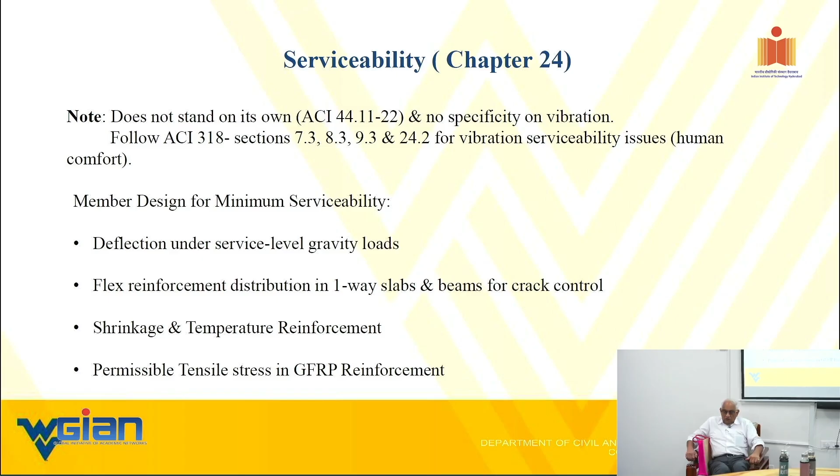If you remember, I said I'd get back to the theoretical part of certain aspects I did not cover, and then I talked about the design example. Yesterday I felt bad because I covered the column design without talking about the theoretical part. So I will wrap up slides 149 to 199, the theoretical part, and then go back to the design examples. All right, let's start.

The theoretical part. I told you many times, this is a course, not an R&D presentation, so pardon me for repeating some things. The idea is to make sure key salient points are retained by you all. You may not remember the details as well as I do, simply because I've been with it for many years. Not that I'm any better, but it's a matter of how you acclimatize yourself to it.

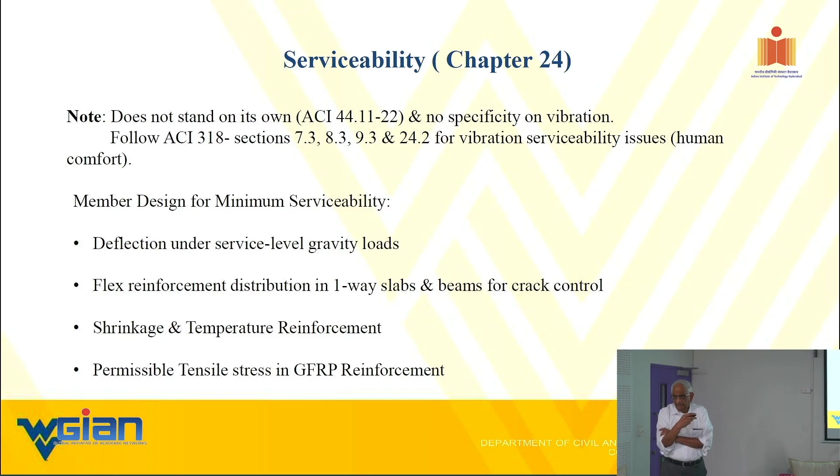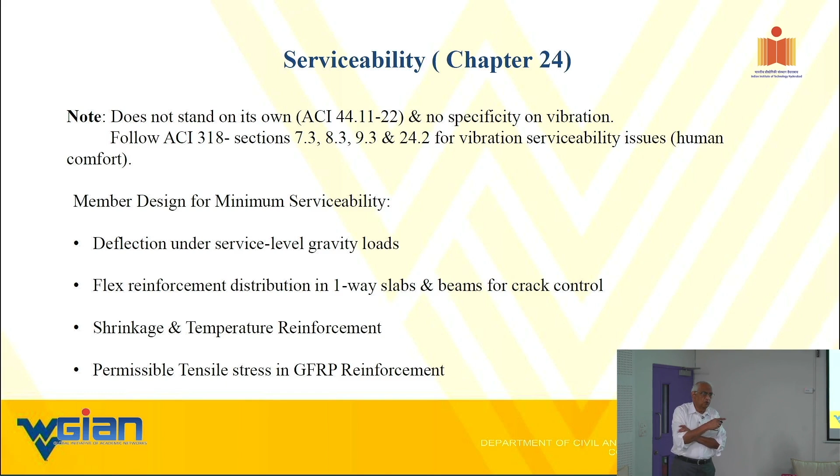Therefore, that's one. So it is even more important that people, there may be walkways on the bridges, people may be walking, pedestrians I mean, while the vehicles are moving. So you see, functionality is, the serviceability limit state varies from one structure to other structure. It also varies within a structure depending upon the functionality of it.

So deflection is one, but it has a lot of other sub parameters associated with it. I just described a couple of them. We can talk on and on about that. That's one. Okay. So the bridges, you're saying that they have more stringent deflection limits, L/800. We also have the same. Probably is it because of the traffic volume that if you allow higher deflections, your fatigue limits will be reached quickly?

Well, that is only one aspect of it. The other very important aspect that we focus upon is the human response aspect. Yeah, I was involved in a bridge, no exaggeration. This bridge, old bridge, 1890s, this is in my town, and nothing wrong with the bridge. There was a light at the end of the bridge, and so people coming from north to south have to stop, whereas there is no light going from south to north.

So what's happening is when the trucks are going from south to north, the people standing with the cars are vibrating too much. So they got scared, so they had to remove the bridge. It's an old-fashioned bridge, in the 1890s. So they put a new bridge to make sure that they satisfied these limits, deflection limit states. That's just one of the several cases.

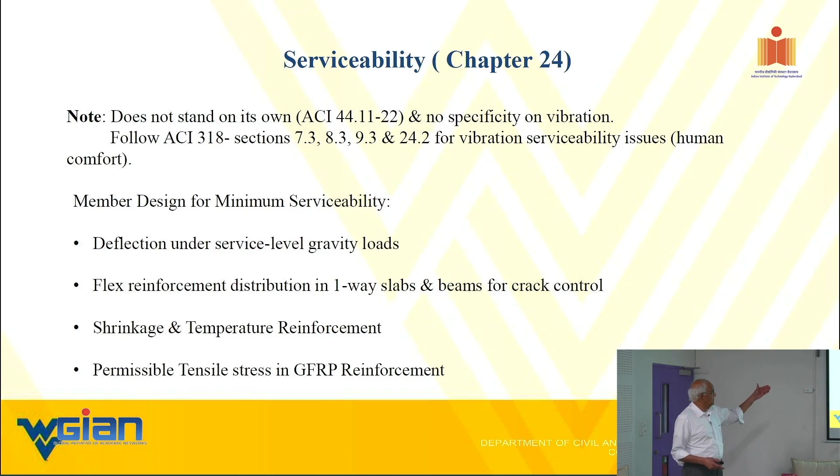I already mentioned deflection. I already gave you a number, L over 360 or 240. Again, it depends on the function of it, and the flexural reinforcement distribution in one-way slabs and beams. For crack control, I briefly talked about it yesterday, and I would like to delve into that a little bit more today, but the message is you need to distribute the reinforcement to minimize any kind of crack.

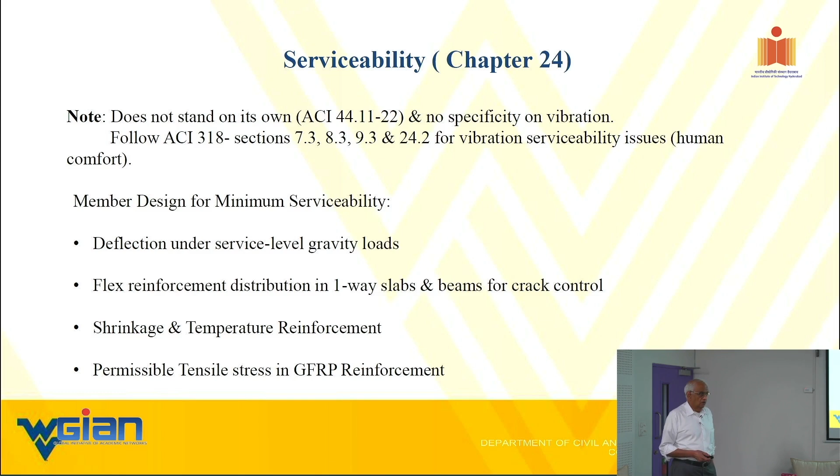And the third is, again, a serviceability issue. The concrete guys are extremely stringent on shrinkage and temperature reinforcement. I don't know how much you use. We use 0.0018 times the bd value per foot. Steel we do 0.0012. 1.2, yeah. We do 180. We are a little bit less.

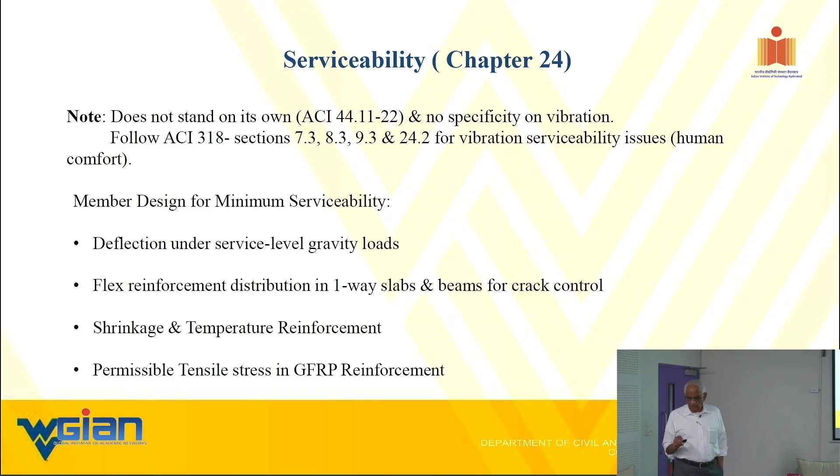Permissible tensile stress in GFRP reinforcement. Like I said, you have seen that 0.01 is the quote-unquote yield value, and that is what we mean by permissible value. That's a fictitious, artificial number, but again, they tied it to the steel yield, and that works. It may be a little bit more conservative, but it works. There we go. And I'm going to show you in a design example what comes straight out.

Flat roof and floor not supporting non-structural members, and deflection for service roof loads, rain load, all those kinds of things where you do not have a structural element. Why they say non-structural elements is minimizing the creep related issues. For that, you see how liberal that is, L over 180. Very, very liberal. Our general line of thinking is mostly in terms of L over 360. See what I mean?

Now, I want to make one thing extremely clear. When we talk about deflection limit states, we are only talking about deflection limit states corresponding to the dead loads. We don't talk about those with reference to live loads. Keep that in mind, because the live load comes and goes, whereas the dead load not only stays there, but also could potentially increase the deflection due to creep.

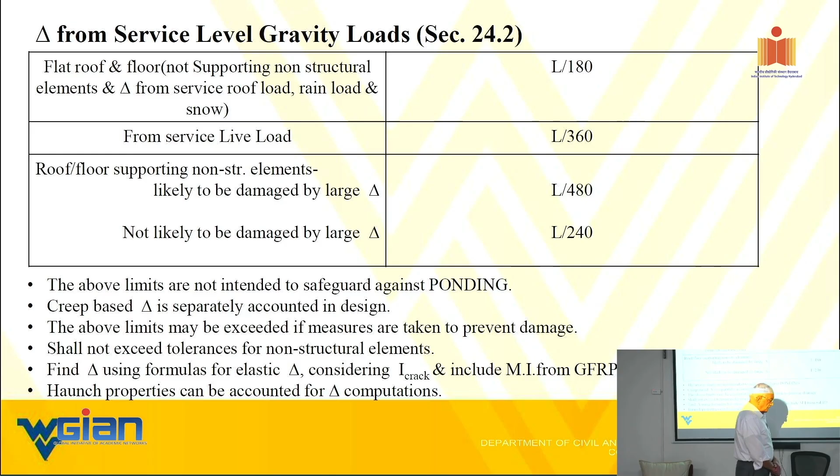If such a scenario exists, L over 480 is what we use. Quick question - do these include long-term deflections, like say 10 years from now? Basically including the effects of shrinkage? We do not compute deflections for shrinkage, but we do compute deflections for creep. Yes, it includes that, but not the shrinkage part of it.

So this is again from the code, section 24.2. The whole chapter 24 deals with serviceability. The above limits are not intended to safeguard ponding - I'm sure you all know what that is. Creep-based delta is separately accounted for in the design. The above limit states may be exceeded if measures are taken to prevent damage, so that is up to you as a designer. It shall not exceed tolerances for non-structural elements.

Finding deflection using the elastic formula, considering the Ie cracked moment of inertia is highly permitted. Haunch properties can be accounted for - that type of thing.

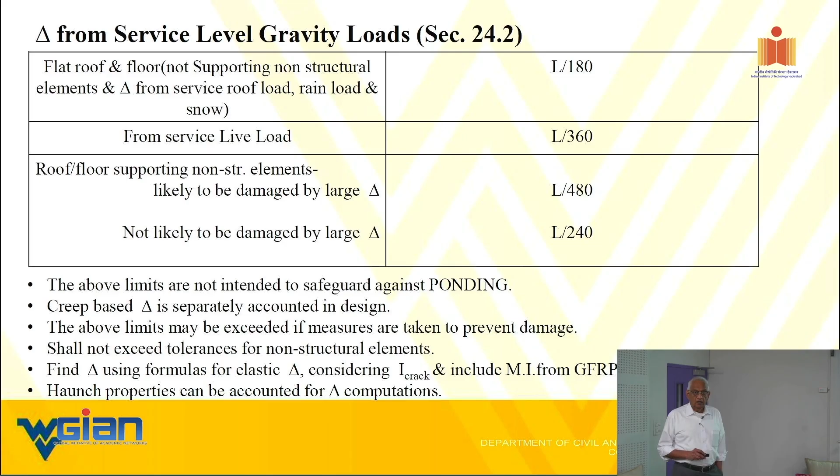So I just read out that, using the elastic formula considering Ie cracked moment of inertia - what does that mean? This is what it means. So what we are saying is, here is an equation that accounts for the cracking of concrete elements that are either reinforced with steel or with FRP. And obviously, elements reinforced with steel are a little bit less stringent than those reinforced with FRP due to the lower E value.

So this is the equation, this is an empirical equation. Branson and Lutz - I don't know how many of you know - it was the original Bible for crack control. It comes from there. For slabs, again, there's a more accurate value, but you can downgrade it by having a more approximate value. I'll show you the more approximate one, but I also gave you those equations, those approximate ones, yesterday.

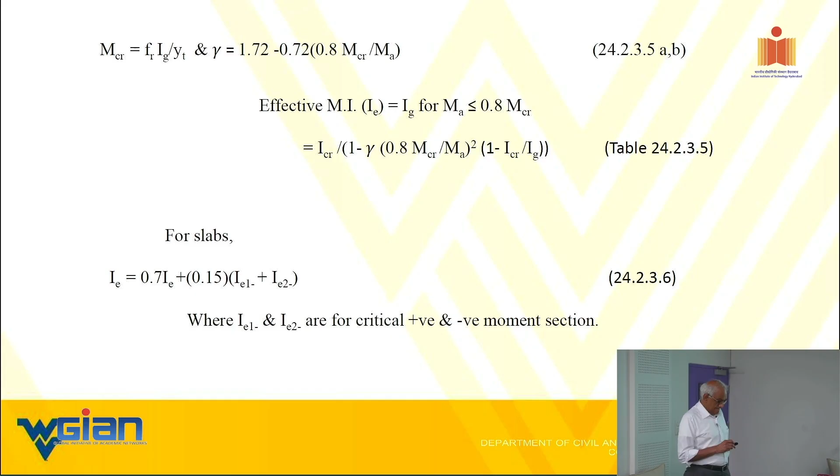So these are coming out of these tables from chapter 24. I showed you this yesterday.

So for composite concrete construction with FRP, if flexural members are shored, treat them as monolithically cast members. If they are not shored, what happens then? A part of it is monolithic for live load, but part of it is not for dead loads. So if flexural members are not shored, load paths before and after composite action need to be sorted out.

Again and again, to make sure you control the crack width, here are the equations given. Distribute reinforcement to control cracking in tension - reinforcement spacing closest to the tension face. These are empirical rules. Again, there is some science behind it, common sense behind it, but ultimately there is no formal derivation behind it.

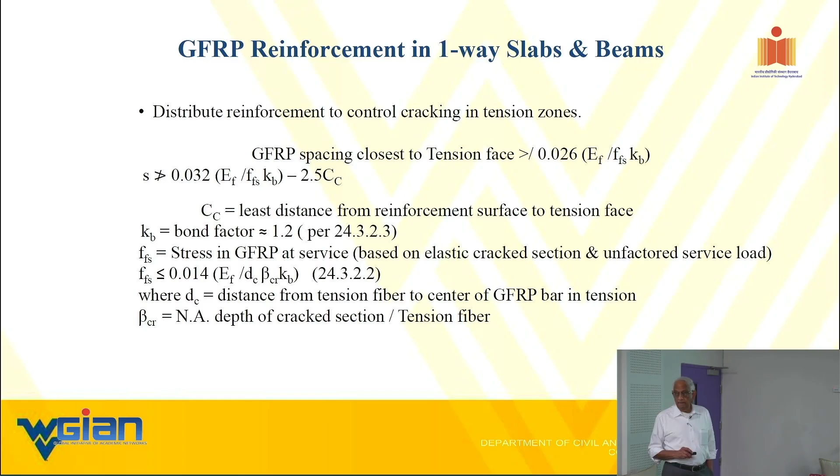If flexural members are shored, treat them as monolithically cast members; if not shored, then it's different. It has something to do with the bonding factor to an extent, but more so with the sustained load concept, and also with the moment of inertia, I. Certain part of the load acts composite, other part, meaning the self-weight, acts non-composite. Therefore you have to differentiate the two.

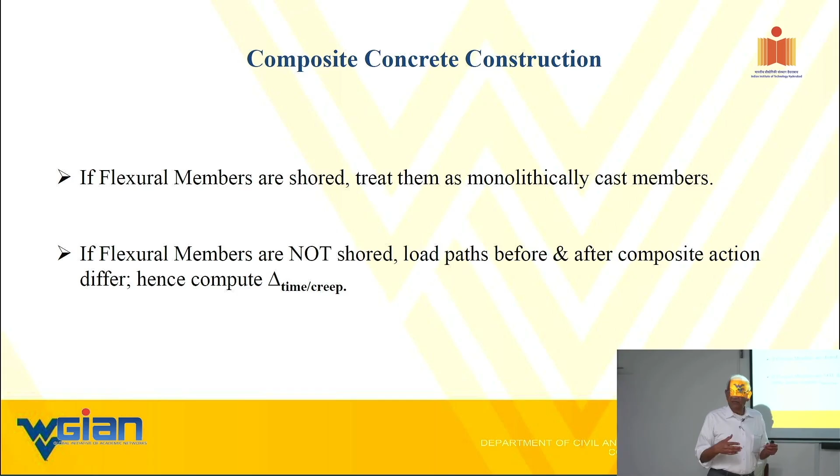The stresses or deflections generated by the dead loads of the beam, unshored, are non-composite. Once you combine the two effects, the live load deflections behave as composite. That's the most critical part of it. I think I explained that.

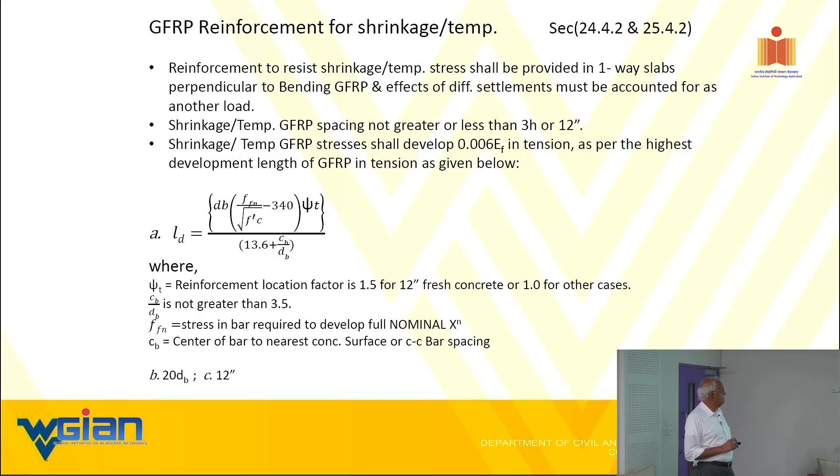The development length for tension terminating in standard hooks—of course we don't have that unfortunately, but they do mention it here. They do have some mechanical hooks or anchors, remember that, but that's the general equation for the development length.

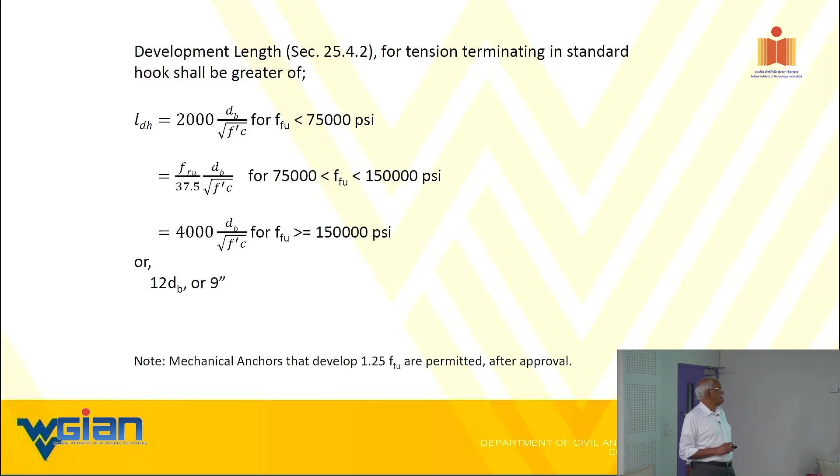There's nothing much I can explain there except simply saying that was empirically derived based on the experimental data.

Permissible tensile stress under sustained load closest to the tension face must be based on cracked section analysis. We did see some of that, and as you can see, this comes from the MC over I type thing, where M is the moment, C is that part of it, divided by I.

The lap splice is not allowed for bars larger than 10. We are not really at this point producing bars larger than 10 for bending purposes in beams, as I understand. Yes, we are producing bars that are 2 inches in diameter, but that is not allowed to be placed as reinforcement for bending or shear. So that statement might sound superfluous at this point, but in future, if you are going to develop number 12 or 14...

We even have a number 18 bar for steel, not for FRP, if I'm not wrong. Those are only used in columns, not in beams, and they've restricted the use of bars beyond, I think, number 14 in beams. It's more like nobody would go beyond number 12, which is 1.5 inches, about 36 millimeters.

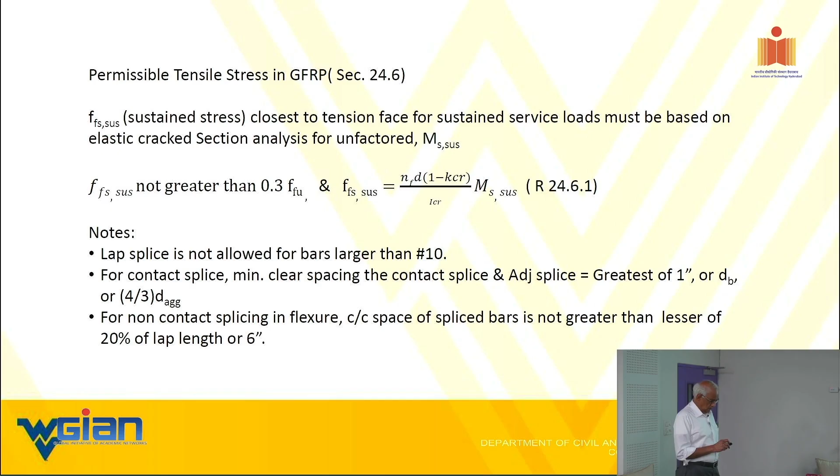The lap splice length in tension—yesterday we talked about the design, but I didn't give you these limits with regard to how much you can provide, and these are all fairly empirical. So please refer to, when you're ready to check and balance these overlap lengths, section 25.7 for GFRP reinforcement splice, where some of the limits are given.

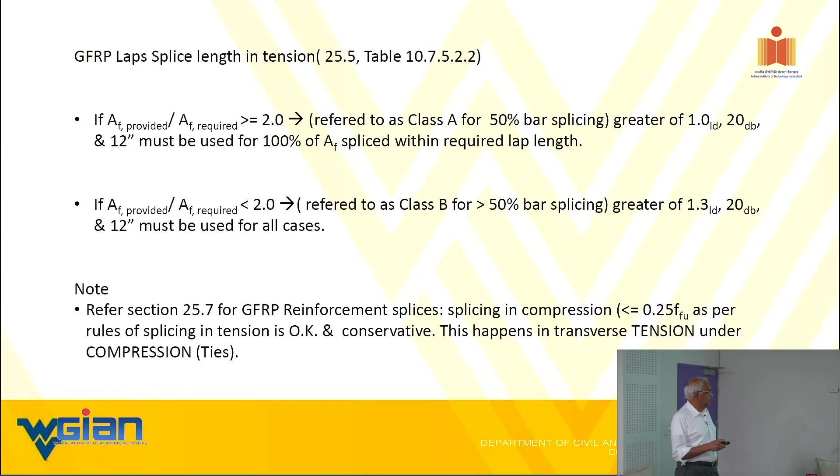So when you go to the beam column design, that's why I kind of left it open yesterday. I said I'll come back and redo the design today. That is example number 12, and I'm now giving you the theoretical backup of how you go about doing that.

So one step is to develop the axial bending interaction curve, which we attempted to do. I was unhappy about it, so I'm going to redo that today.

Developing the axial bending interaction, you saw that, and as of today, the phi value, independent of how much FRP compression, is constant as of now. And we have seen that from the interaction curve.

And for the others, at least you have an idea what goes into it. You may not have the nitty-gritty things, but a broad idea about that.

Elaborating the strength reduction factors, we have seen many times. Reforming the shear strength issues, highlighting inapplicability. Please note the word inapplicability for seismic considerations.

You know, we don't have one yet. Again, that goes back to a simple fact. You need a 3D shaker type, big shakers.

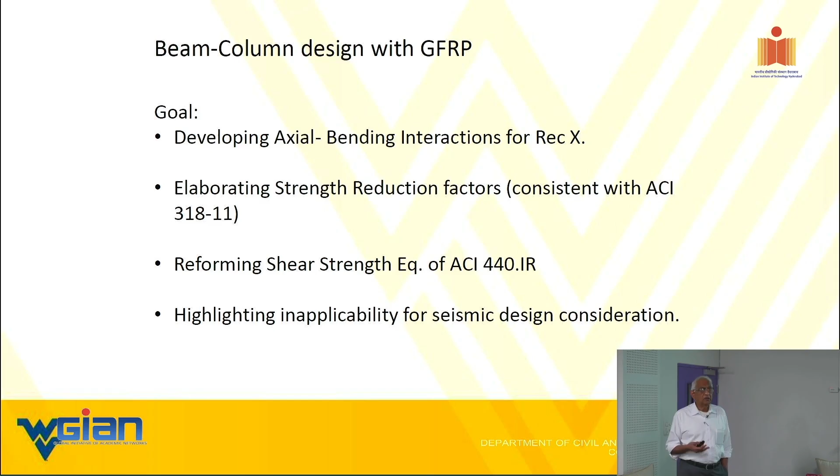So here are some of the design considerations: 1% of the gross area of the concrete, to prevent passive yield.

So the stress in compression, modulus in compression, is 0.55 ffd, and 0.8 modulus in tension.

And I feel obligated to critique the code a little bit. I believe in a concrete environment, that number is low.

Ultimate tensile strain, we have been talking about it over and over, is 0.01, and that corresponds to your 60 KSI. This avoids unacceptably large delta values.

And the max transverse GFRP spacing is very similar, if you recall, to the steel-based design for columns. So it's the least dimension of the column, or 12 times the bar diameter, longitudinal.

24 times the stirrup diameter. So that's pretty much consistent.

All these are the limit states that are required to have a proper design.

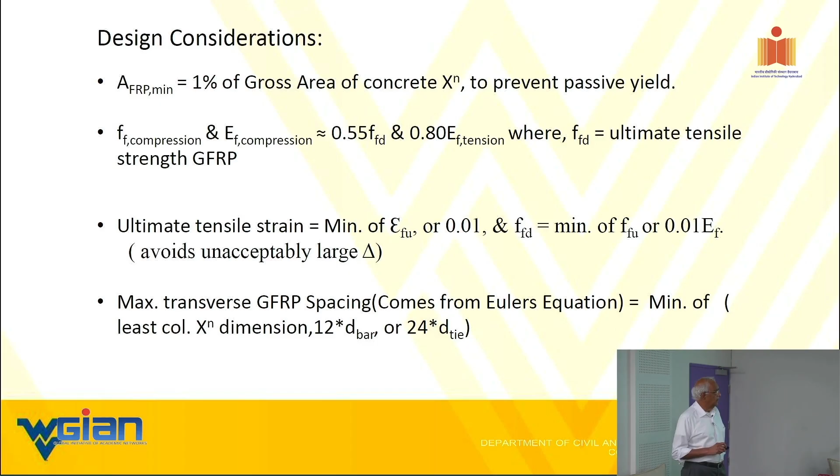Column stiffness, again, I put both of them, meaning steel versus FRP. So for any column, if you look at first order analysis, this is what you follow.

So as I said, you need some strengths and stiffnesses upfront to run a first order analysis.

So that analysis is done by assuming, this is for steel -- next slide talks about FRP. So that first order analysis is done for beams with 0.35 IG, for slabs 0.25.

IG is the gross moment of inertia of the slab or the girder. For steel columns, that is a cruder approximation, whereas this is a more stringent approximation.

I mean, if you want to go in that direction to more stringent approaches, that's fine.

So in beams, we are considering the cracked concrete, so the moment of inertia we are considering is less. That's right, that is called a first order analysis, right? But when it comes to the column, the cracked concrete we don't consider.

The full section -- that is the problem. What you also look at, please, is that the moment of inertia reduction for columns is much, much less than that for beams, number one.

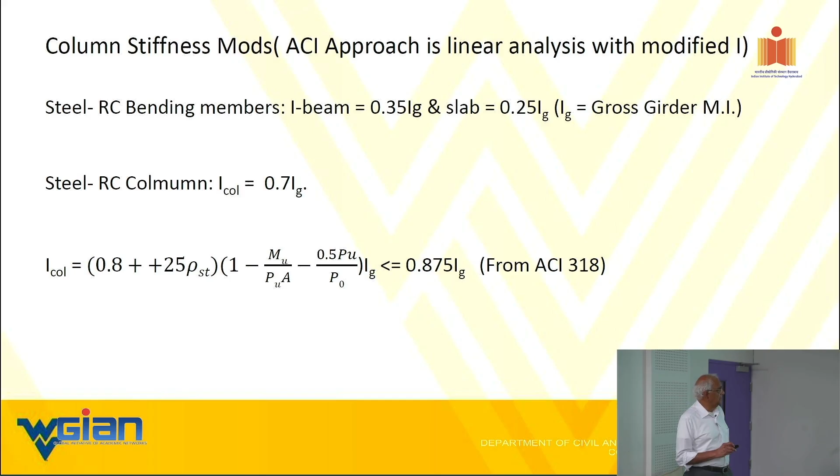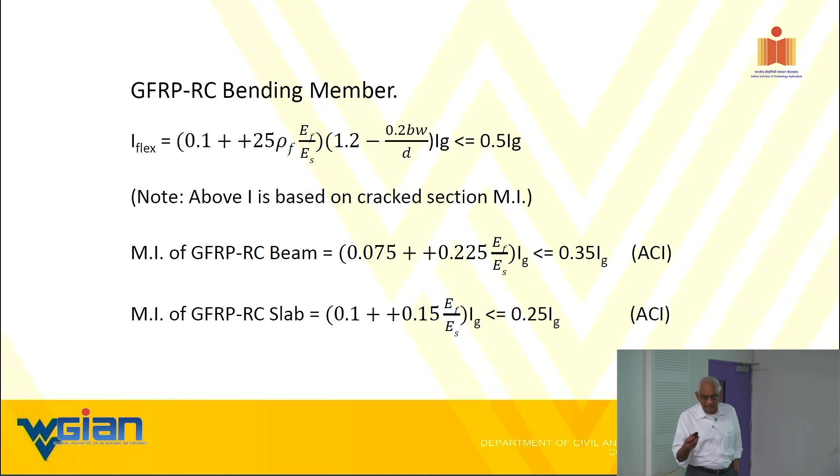So if you look at the similar type of thing that I showed you for steel and that of GFRP, you can see how the numbers are stacking up. Obviously somewhat lower. Yeah, I mean, again, lack of stiffness.

One other thing we'd like to point out is if you're going to simply blindly substitute your philosophy of steel onto GFRP, then we are talking about somewhat of an increase in the amount of reinforcement with GFRP compared to steel. Steel, take a look at it. Any of your old designs, if you have exceeded 1.5%, you didn't do a very good job. That's an inefficient design for steel. Whereas here, 2.5 is an average value.

So again, there are more accurate approaches and more simpler type approaches.

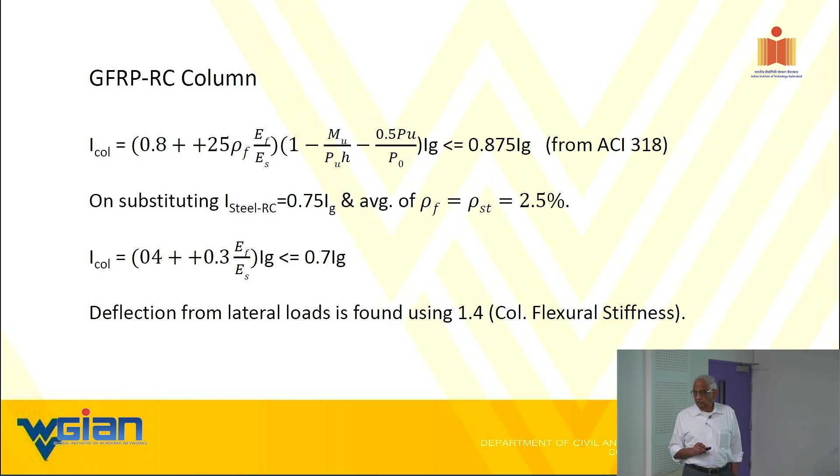We talked about this yesterday, I didn't repeat it. Deflection for lateral load is found using 1.4 times the column flexural stiffness. Slenderness ratio, typically KL over R, KL is the effective value. Please note, typically KL over R, they suggest is 22 or below. Then the slenderness effects for compression member may be neglected.

Whereas that number is somewhat lower for GFRP, and for unbraced, of course it is lower. The KL over R of 22 is probably of the order of 17, 18 for GFRP. For unbraced, it may be 12. This is ACI 318, please remember, is a steel-based code. Therefore you have 22.

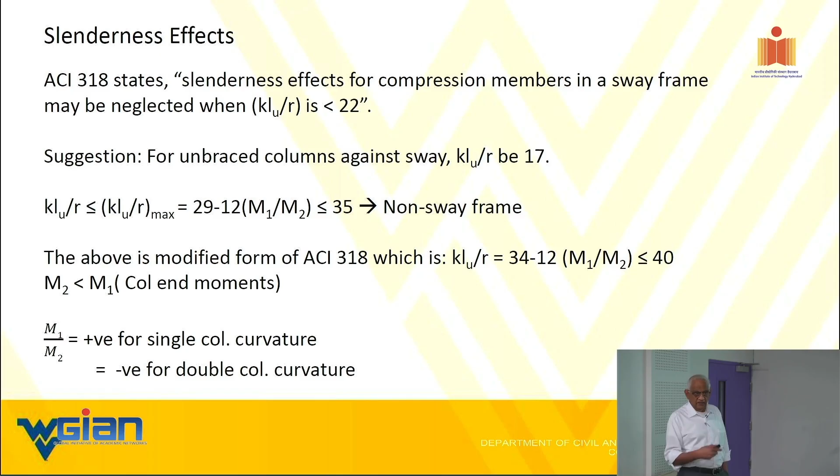Again, these values are modified whether a column is a single curvature or a double curvature. Obviously double curvature ones are much more load carrying elements than single curvature ones. And the code defines what M1 over M2 is. M1 is the moment at the top of a column, M2 is the moment at the bottom of the column. So for a given column, you have two moments at the top and the bottom of the joint, and that is what that is about.

So talking about the interaction, very important, column strength under combined loads is found by satisfying strain compatibility. We saw that yesterday, I'm going to repeat that today. Bars under compression are replaced by concrete equivalent area, implying we are not accounting for the higher order strength associated with the GFRP bar in compression, not in tension. Mn, Pn, we saw that yesterday.

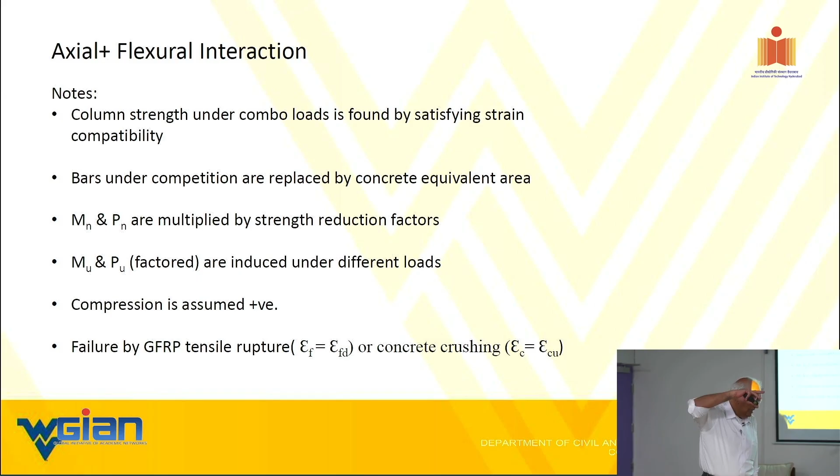That is equally true. Let me tell you, since I did work in the prestressed concrete area, that's equally true even for small presence of moment. There is a small increase in Pn value compared to Pn value where M is 0. But that is so small, like 5% or so, whereas here, in terms of Mn being 0, you get some number, Mn or whatever, with a small presence of P value, you get a 20% increase in Mn value. Even though it increases, on the other side, not as much.

That's why they would start drawing that as a kind of a straight line. So that is that PN curve. A lot of people use it as a 2 or 3 segment analysis, depending on how they deal with it.

Again, we have to worry about the design issue, not that. That's a kind of a parabolic variation there. I'm sure your teacher must have taught you. Similar thing even in steel columns too. Nothing different. Numbers are different, but the shape is about the same.

So, MU and PU factors are obviously induced under different load conditions, and the MU, PUs, you need to be very careful of having different phi factors, because under certain scenarios, MN in a given scenario may be in tension failure or a compression failure. Depending on that, your phi factor is different. That's why you need to be careful. It's not just a parallel line drawing down on your PN and MN.

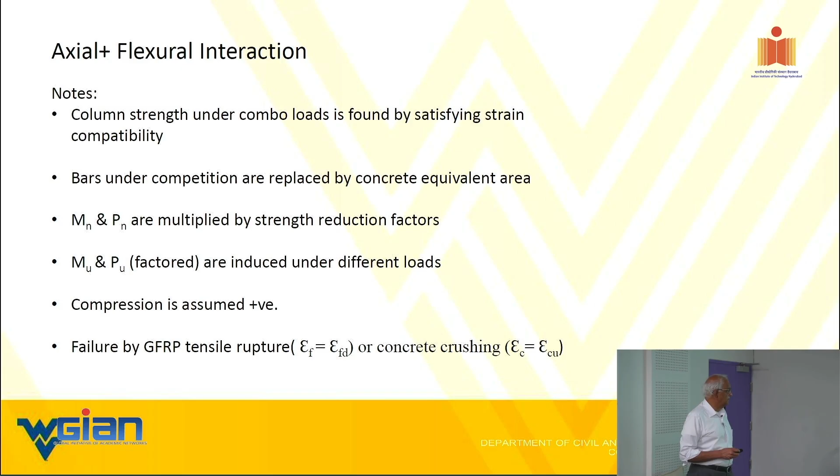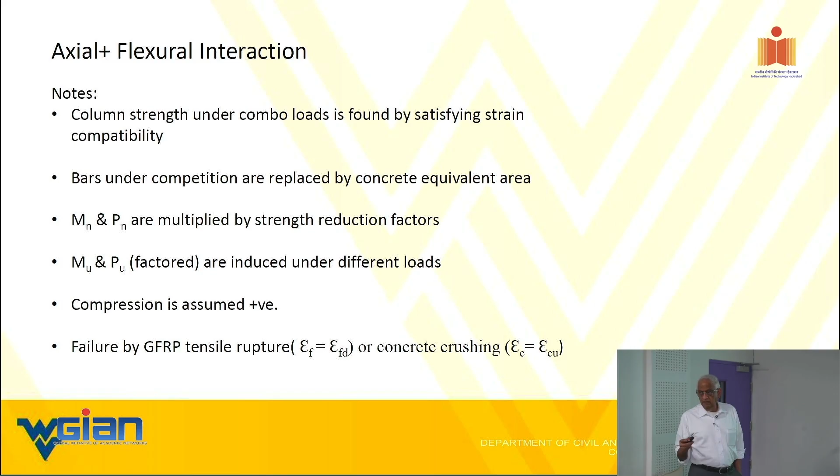Failure by GFRP tension rupture or concrete crushing. This is a very standard approach over and over. The last line is our design basis, or PM diagram development, is based exactly on that.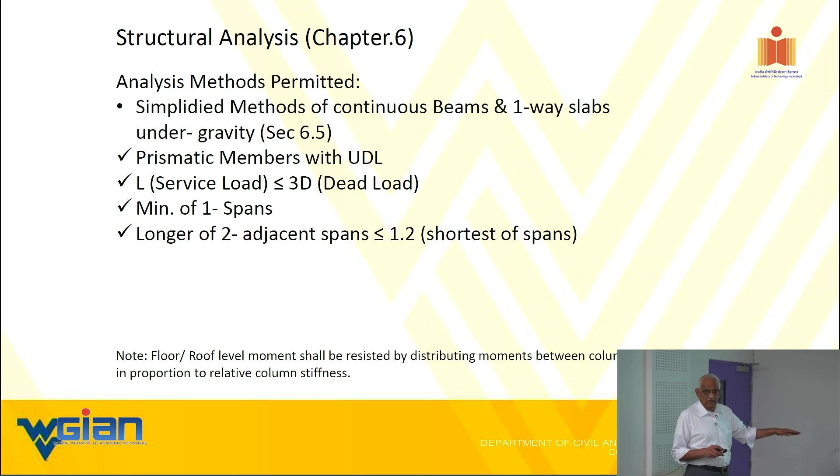And what are those coefficients? They're given to you right there. Please note, you don't have to remember your conjugate beam method or some slope deflection method. You don't have to go to your computer, only if you want a good quick check. This is what the coefficients recommended by ACI look like.

And if you remember yesterday, we used those two - WL square over 14, and I think the other is WL square over 10. That's different from shear, and the right-hand side is given for shear.

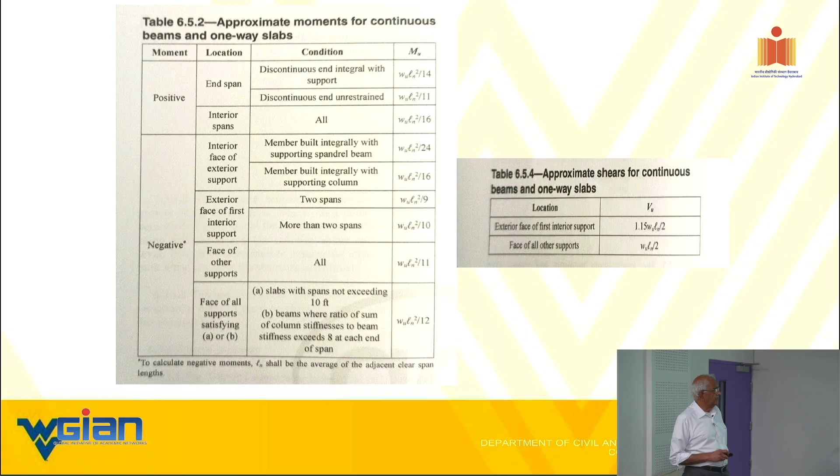Now the first order analysis - what is the first order analysis? Without considering the P-delta, that is true. However, the first order analysis implies we're talking about lowering the I value of a beam and the column below that of I sub G. That's what first order analysis is. Now you take a frame, you have a gravity load, a wind load, and then run an analysis with lower I values.

So the moment of inertia for the elastic analysis under factored loads for columns and beams is 0.4 and 0.15 of the gross value. See how dramatically lowered - look at that, how small that number is. So you need to keep that in mind when you're running it. This is for failure analysis, not for service analysis. So keep that in mind.

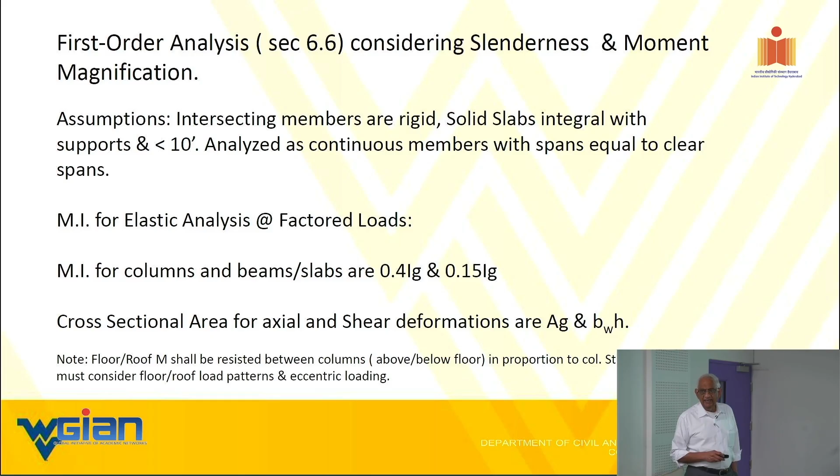So the floor roof moment shall be resisted between the columns in proportion to the column stiffness. We saw that yesterday, I didn't do a great job, but that's what it is. You know, we call them some charts - you call another name for it. You were showing those distributions of how the stiffness ratios are used to get the effective length - yeah, the K value.

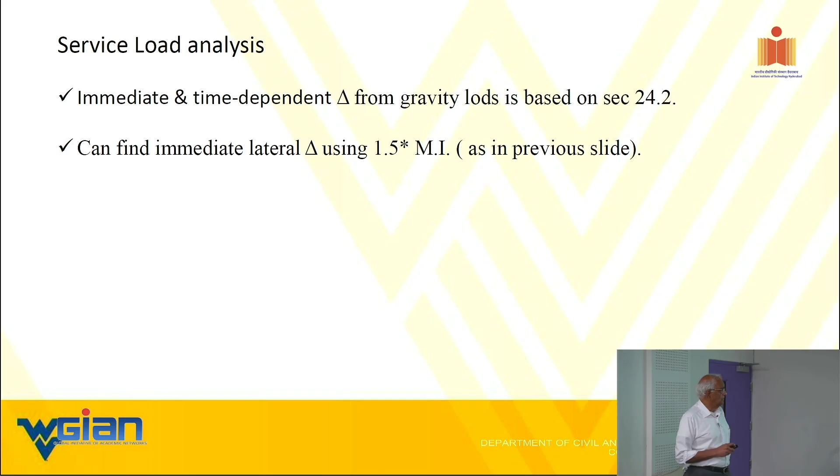So the service load analysis has immediate and time-dependent deflections from the gravity loads, and that is well laid out in section 24.2. So you can find immediate lateral deflection using 1.5 times the, as we indicated in the previous slide.

So when you account for the slenderness ratios, this is a fairly complicated approach. How do you account for that? The point is, once you find the static values based on the reduced I values, that's one part. Then you have to add the other part due to some kind of a delta deflection effect. This is the first order analysis, including the deflections - so not P-delta effects, but some bending-associated issues are incorporated in the design.

So the way you go about doing that is what's laid out here. First thing first, design column per unbraced - that means KL over R less than, that's where I laid out the steps, all the different steps you must check and move forward. So there are about 8 or 9 steps. The factored moments are delta M2. What is delta? It's defined right there.

So it is this M1 and M2 that you're going to place at the top and the bottom of the column nodes. So Cm is defined there: M1 over M2 is negative for single curvature, positive for double curvature. You know what single and double curvatures are. If you don't, let me know. The Cm value is 1 for a column with transverse load applied between supports.

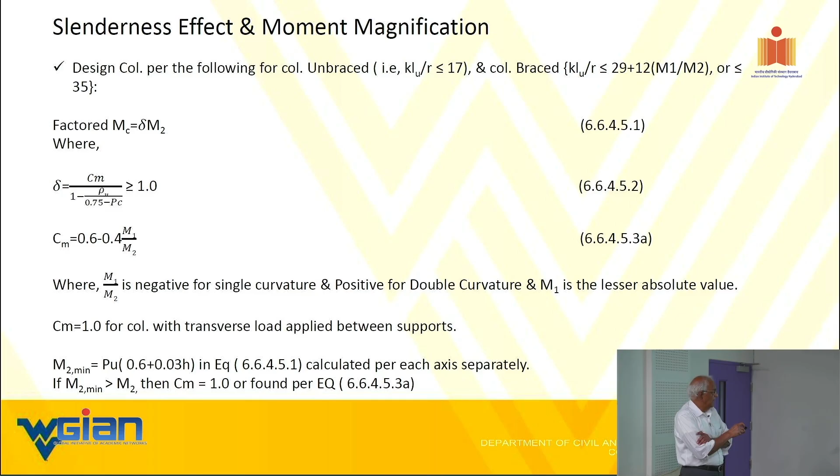So the more accurate computation for M2 min is PU times (0.6 + 0.03h), coming from equation 6.6. So if M2 min is greater than M2, then Cm is 1. So here is the delta S coefficient. Again, that's defined, and I will be doing that example today.

And you can see that M1 NS is added to delta S. So this is your moment due to the delta in a static sense. Likewise, M2 plus delta M2S, where delta is defined, and Q is that coefficient. I will show you how to get that Q in a minute. So this is the critical part. What is delta S? It is a magnification factor.

Instead of using the P-delta effect, which magnifies the moments and the deformations, this is a pseudo approach in terms of how you magnify due to lateral deformation coming from wind or other forces. So this is given. I will run an example today. What is PU? What is PC? I'll run that, but I did define those.

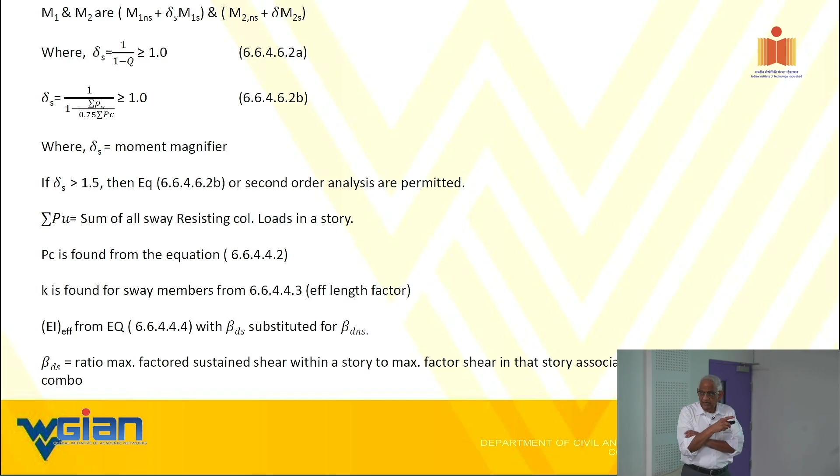If you want to take K as 1.5 and move forward, fine. On the other hand, if you think K is going to come out less than 1.5, after the first iteration you do a couple more iterations and establish K as 1.2 or 1.3 or whatever. But if you are lazy, just take it as 1.5. But in using FRP, generally we won't use second order analysis; that's not allowed. If delta S is greater than 1.5, what do we have to do? Right now, the code is saying we don't want to get there because we don't have the data.

That is the problem. So please note, I'm not avoiding answering a question, but the code itself is hiding due to lack of experimental data. I can do all I want with the theory and finite element analysis or the matrix method, but you have to back it up with experimental info that's absent.

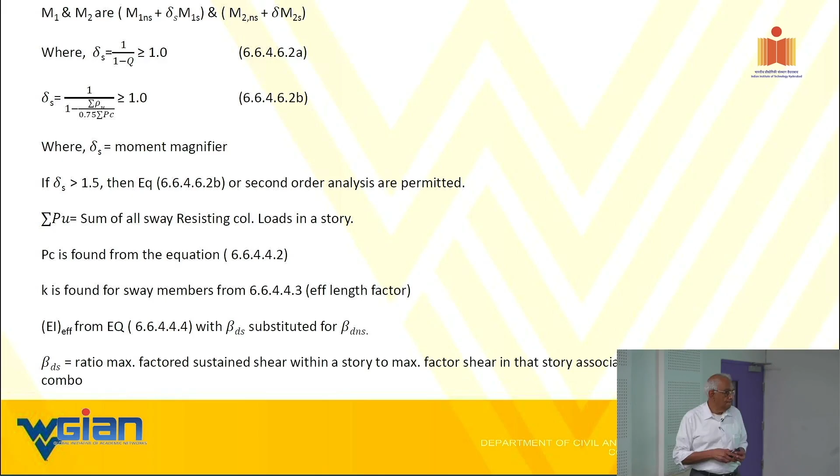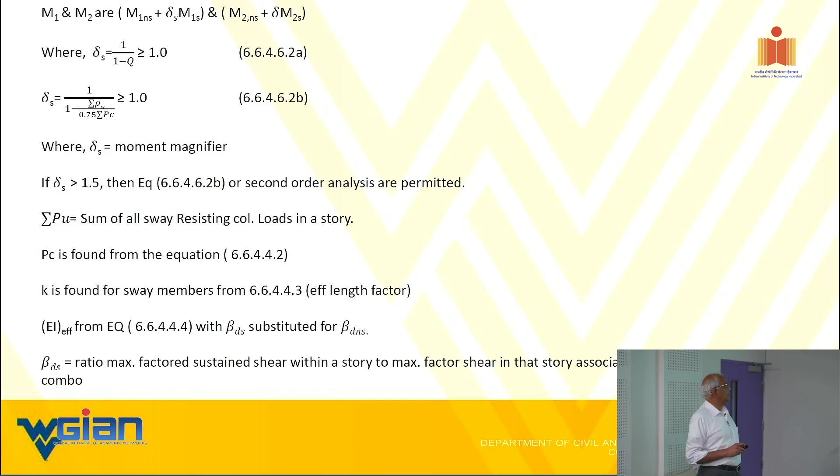So again, all the definitions are given. Beta sub ds is the ratio of max factored sustained shear within the story to max factored shear in the story associated with the same load combinations. So these are the definitions. I'll run an example and show you how they're applied. I think I defined that cap Q in the previous one somewhere, but that is what that is.

And PC is pi squared EI over L squared. For the effective value, please note how dramatically it has been downgraded, 0.24, because of the cracked section. So as I said, I have a lot of admiration for these concrete guys, how they have reduced this very complex cracked design analysis into simpler approaches.

The steel guys couldn't really do it. They were all confused about the plasticity aspect beyond yield, they hassled with it, and they gave up after a while. Right? We were doing design for almost 10 years with both elastic ASD, allowable stress design, and plastic design. The code had both for about 10 years, then they quietly dropped the plastic design approach. But the concrete guys kept at it, and that's why they have these reduction factors.

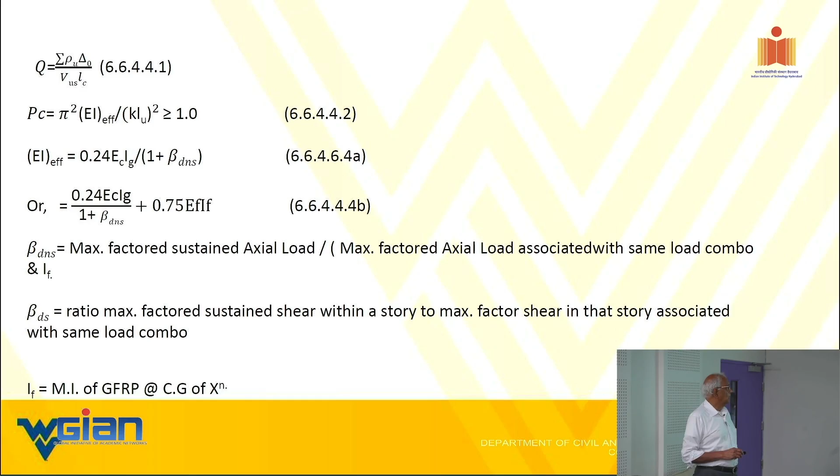So another, more accurate approach is perhaps this. It's entirely up to you to use A or B, where beta sub dns is max factored sustained axial load divided by max factored axial load associated with the same load combination. Okay. So those are empirical; you have to stay with that.

The design approach for beams and one-way slabs is given in chapters 7 and 9. Chapter 7 deals with one-way slabs. Chapter 9 deals with beams. So, what's the design philosophy? The code, as you can see, talks about sections 7.1, 7.2 and 9.1.

7.1, 7.2 on the one-way slab, 9 on the beams. So we are not talking about voided slabs, we are only talking about solid slab. The reason I say that is I saw a few voided slab testing going on downstairs, so you can see that. Why do you use a voided slab? Do you know? To economize the section. That's one, yeah. So why void there?

Longer spans. In the neutral axis portion, the concrete is not necessary. Right, that is the point. You get it? Why do you remove concrete at that location? Because the effective value of moment of inertia does not decrease much if you have a void there, while in fact you can save 50% of the unit area or weight. Both are same, okay? But more importantly, what does the void do?

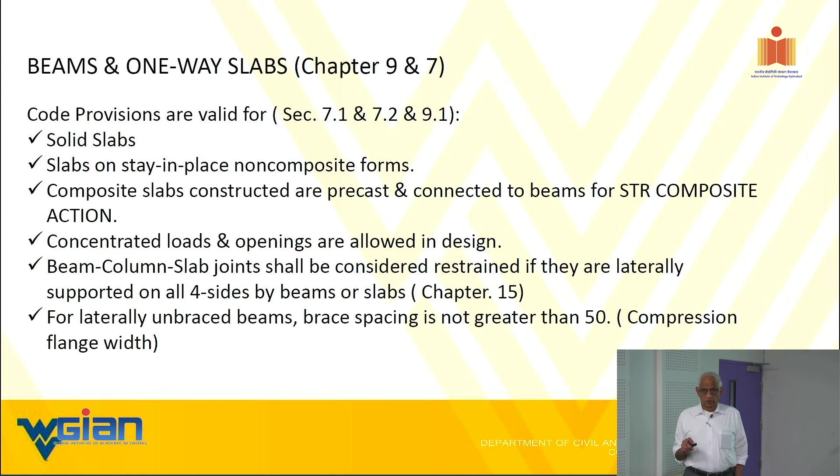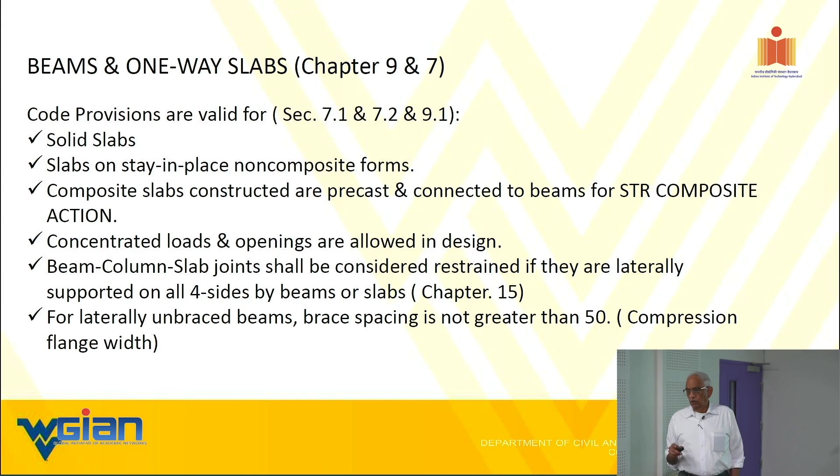So anyway, slabs on stay-in-place, non-composite forms, composite slabs constructed or precast, connected to beams, all these are included in the code. That's my point. Concentrated load openings are allowed in the design. Beam column slab joints shall be considered as restrained if they are laterally supported on all 4 sides. For laterally unbraced beams, brace spacing should not be greater than 50. So these are the constraints they have provided you in the code to move forward with GFRP.

Always you have the design limits for slabs and beams. Minimum slab thickness is same as the beam thickness and satisfying the maximum permissible deflection, which is, I already gave you those, L over 180, 240, 360, and 480. F sub Fs sustained load, that's the key. Now you can define what is the sustained load. Is it just the dead load, or is it the dead load plus 20% of the live load? Typically, we take dead load plus 20% of the live load.

And if you have any kind of utilities hung to the ceiling or someplace, you need to account for that. A lot of times people don't realize some of the utilities are hung on the bridges. They're very heavy, particularly the water lines, for example, not the gas lines, but the sewer lines, the water lines are very, very important, really. So those are the kinds of things.

Again, this is the MC over I concept, except that the definition of this is different. And what is the C value? Please note the C value is 1 minus KCR. That is the depth of the cracked concrete. That's the C value. That is the stress. D minus KD, right? That is the distance to the tension side of the cracked beam for GFRP. That's what that is. What is that now? D times this, that is the distance from the neutral axis to the tension side. From the neutral axis of the cracked section to the center of the tension reinforcement.

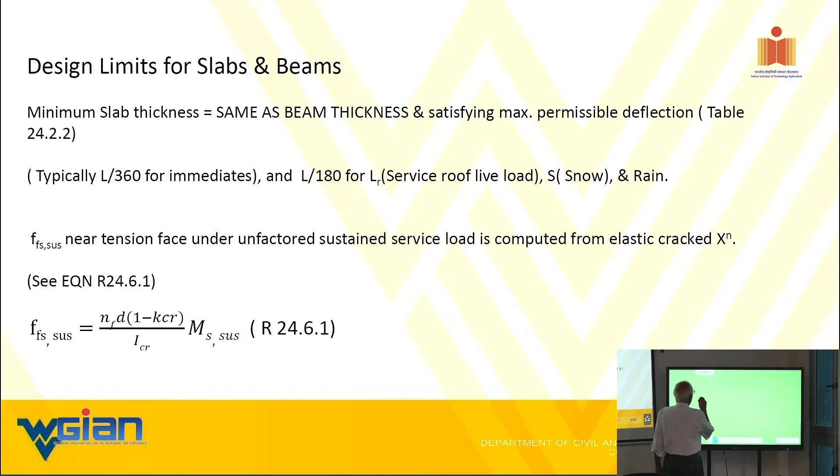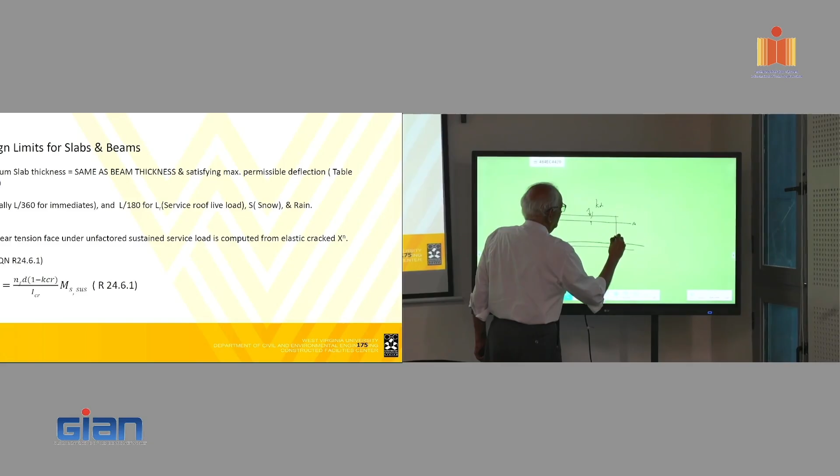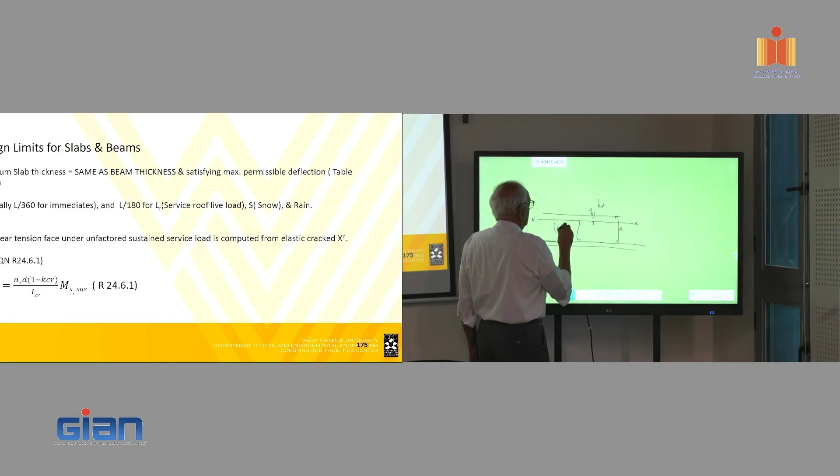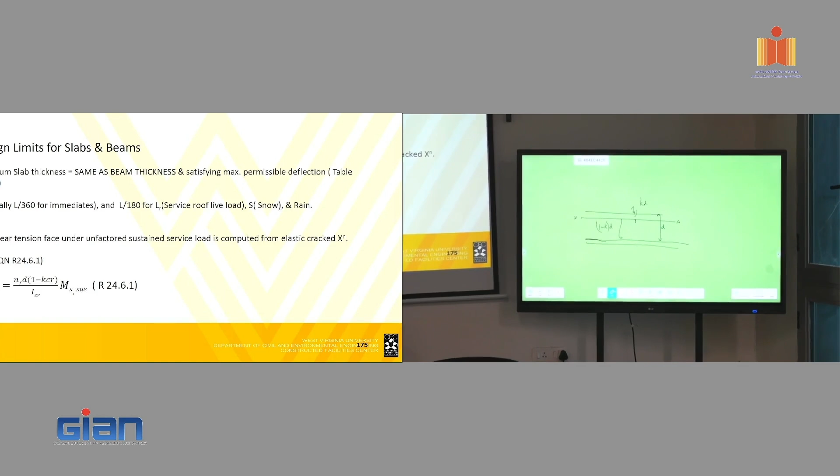Clear one, yeah. So what we are saying is that if this is the cracked value, that's the neutral axis of the cracked section, this is KD. Whereas this is D. And it is this distance, 1 minus K times D. And please note, this stress that I'm referring to is the stress in the reinforcement. So it's the same MC over I concept, right? Except the C is different.

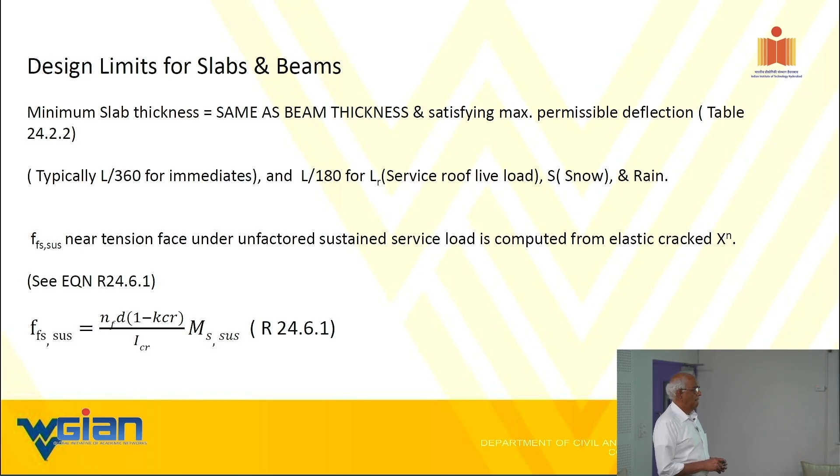Okay? What is that? CR? Correct. It's cracked. Okay. Yeah. Okay. All right, next.

Effective flange width. I'm sure you all know how the T sections are operated or designed, same deal, except sometimes they have a slightly lower effective flange width, again coming from the philosophy of lower stiffness of FRP than steel. So these are very easy to follow. Even if I read out these, you will forget it anyway. But when you're ready to design it, keep this open in front of you and then establish what the effective values are.

For isolated T-beams, flange thickness should be greater than 0.5 bw, that's the width of the beam, of the web, if that's what you want to call it. Effective flange width is less than 4 times b. It's a very stringent value. If you look at it, very small value, nominal value really. This is where they didn't do any testing, but they gave concession for what typically happens under field condition.

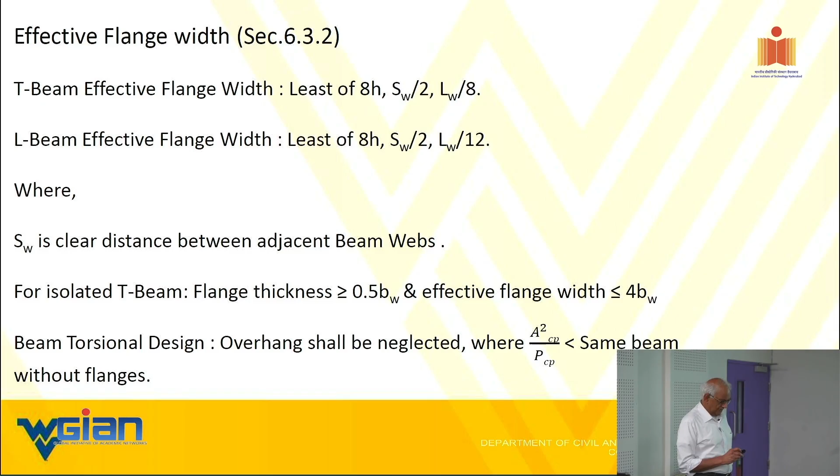Beam torsional design, I'm not going to get into that in this class, but overhang shall be neglected, where A squared over P is less than the same as the beam without flanges. Required strengths, we talked about it and we are designing it.

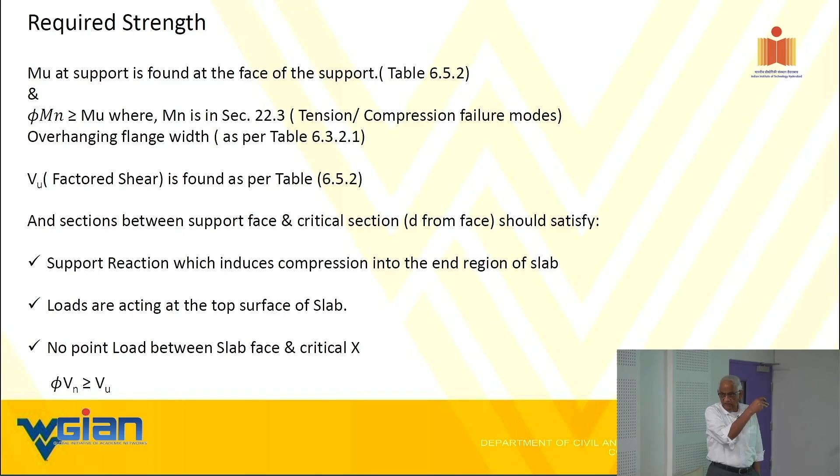This philosophy is what we call, I don't know what you call it. You also call it LRFD? Okay, you call it limit state. Yeah. So we call it LRFD, load and resistance factor design. That's what we call it. You call it limit states. Okay. So we have seen this pretty much all along. There's nothing more I can explain here.

Sections between the support and the critical section should satisfy the following items. So the limits, we talked about it, 300 over ffu Ag. This is a very similar limit state you have for steel. I think that number is different, but it is about the same. Okay, I think it's lower, if I remember right, for steel.

So in shear, you can see phi is the factor 0.75, and kcr is what I just showed you today. Whenever I put a kcr, you must have the d factor, that is the depth that is there. So kcr times d is the depth of the neutral axis.

Okay, so minimum GFRP spacing is as per section 25.2, and all the others I described earlier shall not be greater than 3 times the slab thickness or 12 inches, all that kind of a thing. Critical sections for development of GFRP are max stress locations in the slab, wherein termination points need no GFRP. Terminate GFRP where it provides stiffness to satisfy deflection requirements at a distance greater than d or 12. These are rule-based approaches.

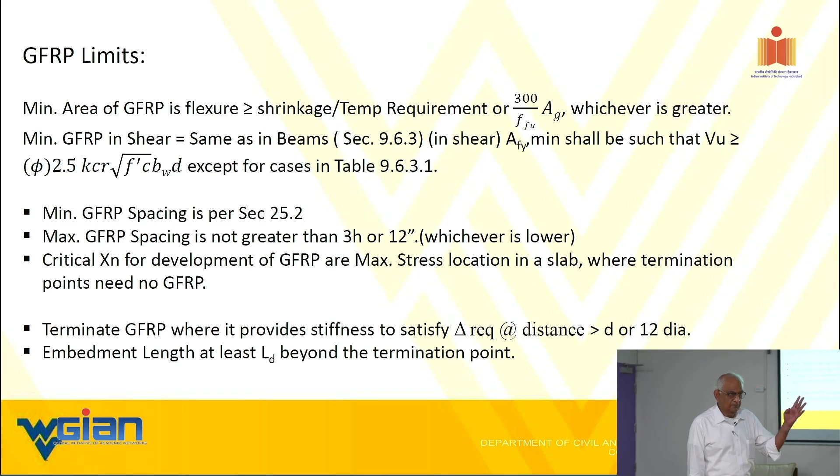We have a 10 minute break. The tea is ready outside. Please.

Guidelines in terms of when to use and not to use the termination of the bars in the tension zone. That is the key word.

My copy is floating around in terms of the design example. All I want to say is there are several editorial errors in that. I'm going at some point to provide them the feedback so that they will make the corrections, but there are many, so keep that in mind. That's all I'm trying to say. So nothing conceptual. Editorial. Unit mistakes, and sometimes units have been mixed. Not only that, the intent is we want to take the smaller of the three rules, let us say. They keep calling it higher. But there are many other smaller editorial errors. So whoever is looking at it, please look at it with a critical eye. Don't take that for granted. I will leave that book with Professor Surya Prakash, and you all can use it.

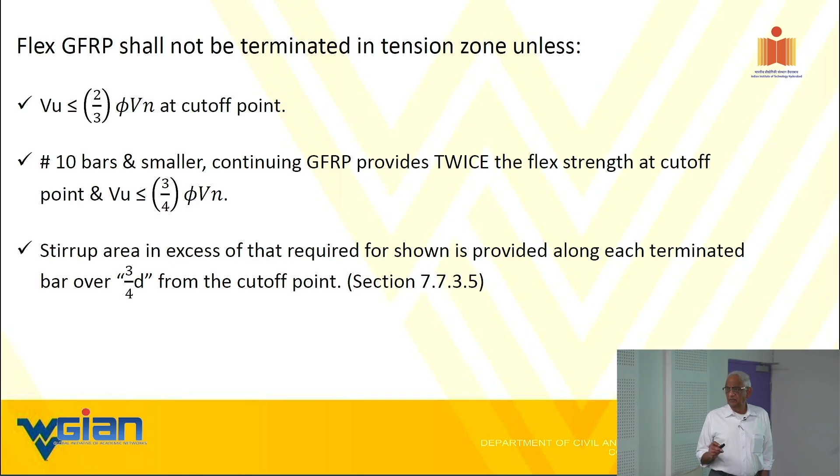All right. So here are some of the rules that one must follow when you are terminating the FRP bars in the tension zone. Obviously, the most important thing that again and again comes to mind is the flexibility of the bars. So again, these are all rule-based, common sense-based. They are not physics-based. I mean, there's physics behind it, but there's no derivation type stuff in it.

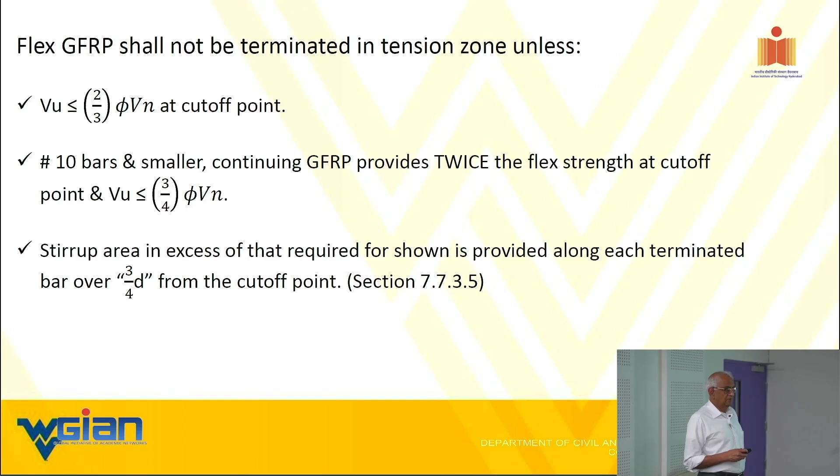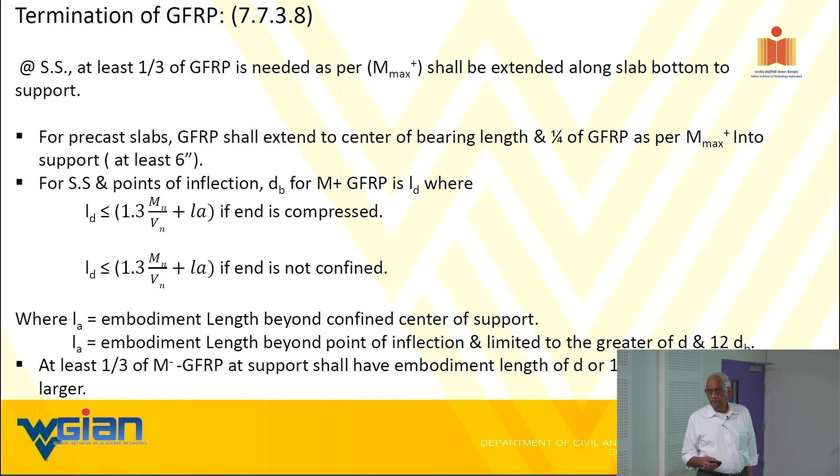Okay, for precast slabs, GFRP shall extend to the center of bearing length, and a quarter of GFRP as per M max positive into the support, or at least. Again, these are rule-based, common sense-based limit states that they have provided. And another, ld, that is the lap length type of a thing, or embedment lengths beyond the inflection point are provided. I'm not going to read it out, but that's the general idea. So keep that in mind. I'm supposing that you all know what an inflection point is. So, okay, good.